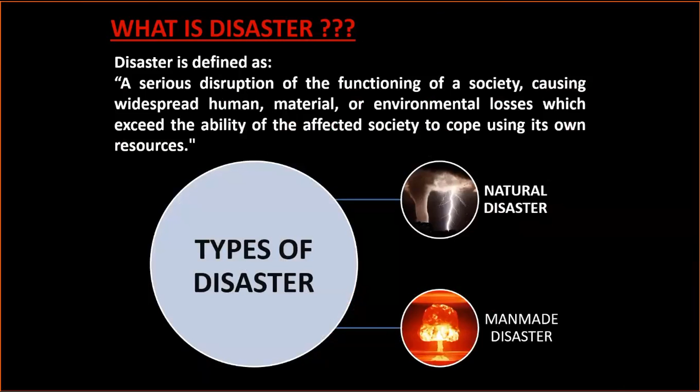We know what is the definition of a disaster. Disaster is normally defined as when the functioning of the society is totally stopped. The human life is totally disturbed. There are environmental losses, there are material losses. Disasters are of 2 types: natural disasters and man-made disasters. Under natural disasters come earthquakes, floods, tornadoes, fires, hurricanes, thunderstorms, and ice storms.

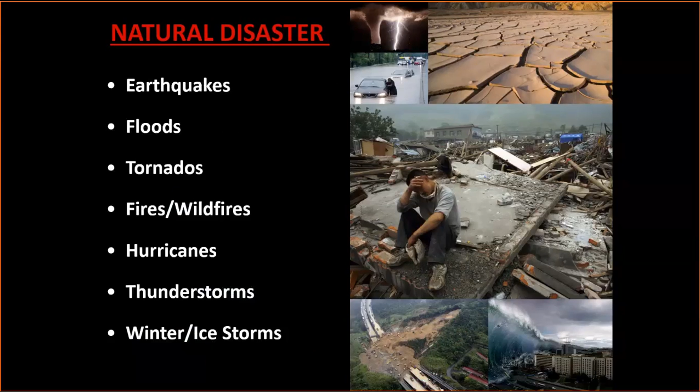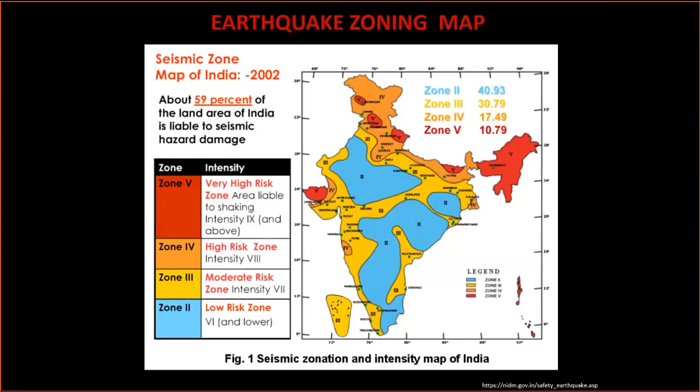Coming to earthquake, this is the seismic map of India. It is indicating that India is divided into 4 zones. Zone 5 is a very risky zone because here the intensity of the earthquake is liable to be very high, zone 4 is comparatively less intensive, zone 3 is moderate, and zone 2 is a low risk zone. And this is earmarked in different colors in this slide.

When any earthquake comes, obviously there's a huge loss of life. There is a huge loss of property. Then the invaluable heritage is totally lost whenever any earthquake comes. Communication networks always break down, and the power goes off. Transportation system stops working. The whole network breaks down.

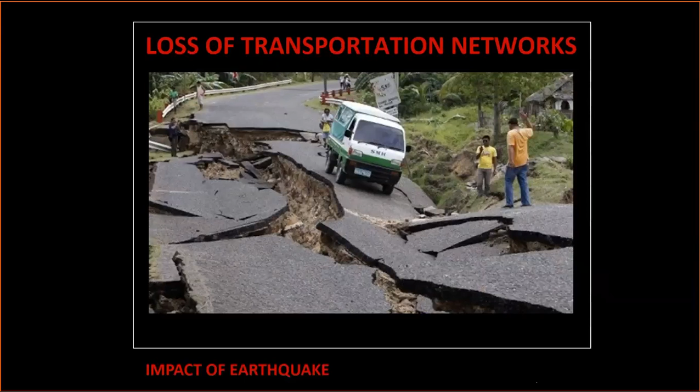Earthquakes have many types according to the intensity, according to the magnitude. And if we see the global occurrences of earthquakes, the highest category is rated as great earthquake, which is when the magnitude is greater than 8. The global occurrence is one earthquake of great category in 1 year on an average.

Then major earthquakes are more than 7 degree and less than 8 degree. About 18 major earthquakes come in a year, and strong earthquakes vary from 6 to 7 degree, and about 120 earthquakes come in 1 year. Moderate ones vary from 5 to 6 degree, and about 800 in number. You see the number. 800 earthquakes in 1 year of the moderate category come around the globe.

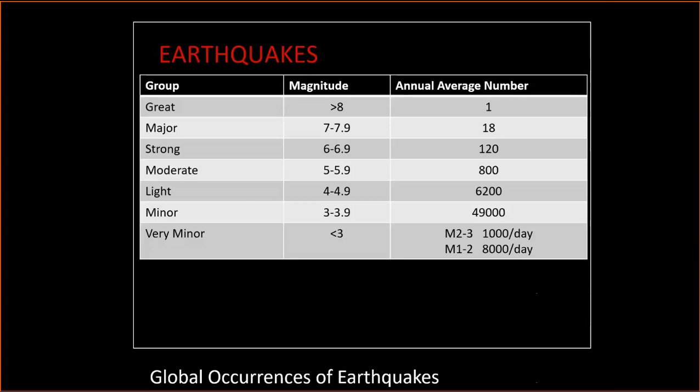And in the light category, which is from 4 to 4.9, about 6,200 come annually. And minor earthquakes are something like 50,000, and very minor are so many. So you can see the intensity of the earthquakes, the numbers. I will quote some examples.

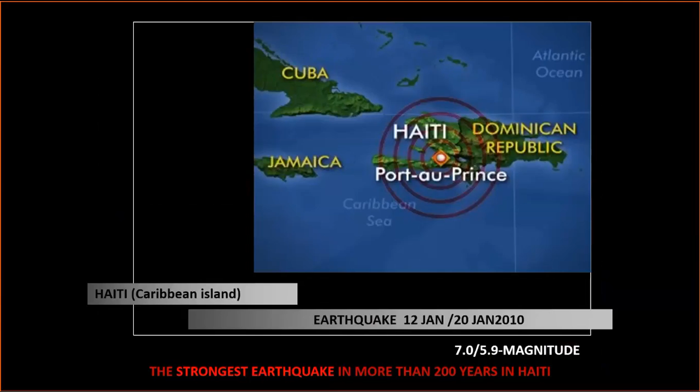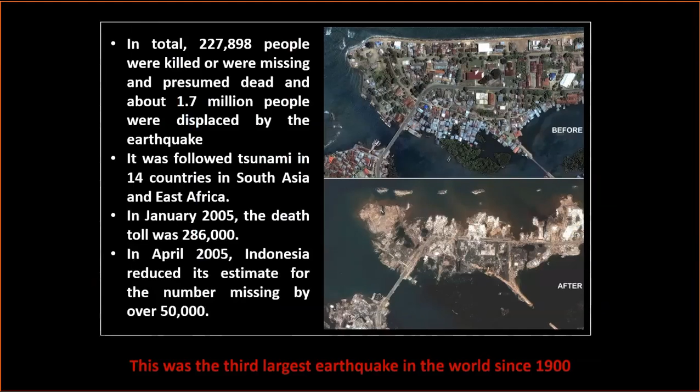Then in Indonesia, in the year 2004, there was an earthquake of magnitude 9.1. More than 2.27 lakh people died in this earthquake, and it was very severe. You see, so many people injured, and more than 2.27 lakh people lost their lives. And you see in the images, the entire place was almost finished after the earthquake.

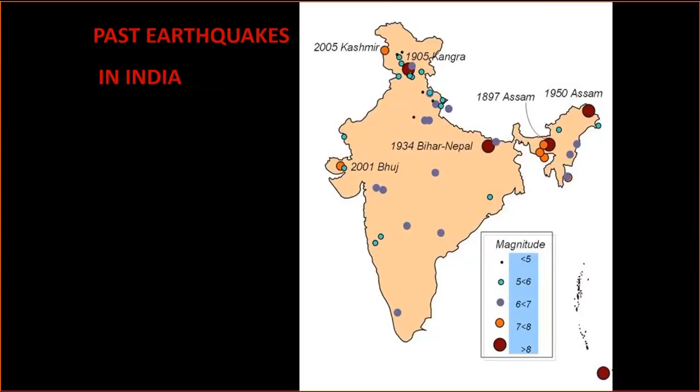If we mark all the earthquakes which have occurred so far in India, this map indicates small, big, bigger and biggest earthquakes. You can see hardly any part of India is very safe. Earthquakes do come in every part of India. The intensity may vary from smaller to bigger.

We all know that when buildings are designed to be safe, first of all, it is the role of the architect, because the architect is the person who coordinates with the consultants and the engineers, who gives the shape to the building, and who coordinates with the structural engineers to design the buildings. His role is very, very important.

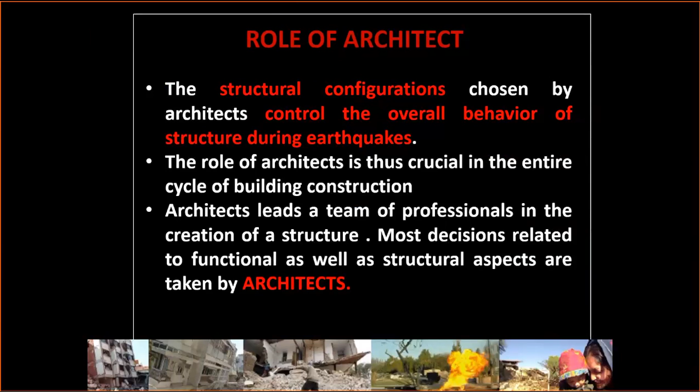When we talk about the seismic design philosophy, we can have two models. One is earthquake-proof buildings, which are not possible. It's an unrealistic dream. You cannot make any building earthquake-proof. But the realistic approach is that we can make earthquake-resistant buildings. Earthquake-resistant buildings are possible, but earthquake-proof buildings are not possible because of budgetary constraints.

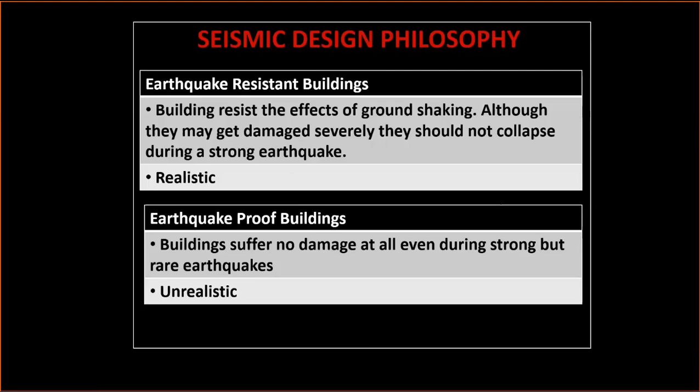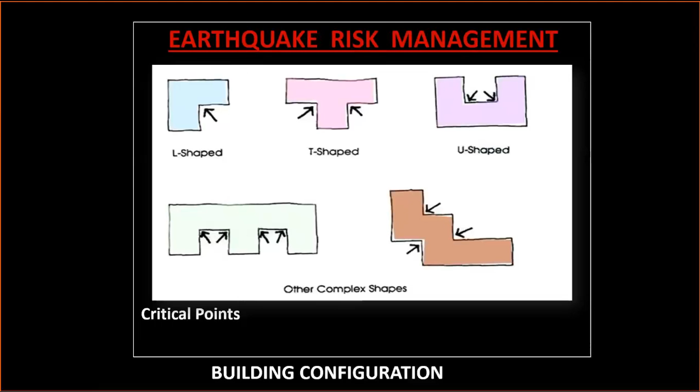These are the different plans of buildings. It shows that whenever there is any bend in the plan, that is liable to be exposed to the danger of earthquake. Earthquake forces are very active on corners. And you see, this is a building. When the earthquake came, only the corner portion fell because that was more prone. Forces come from both sides and the corner gets shattered, and the rest of the building is safe.

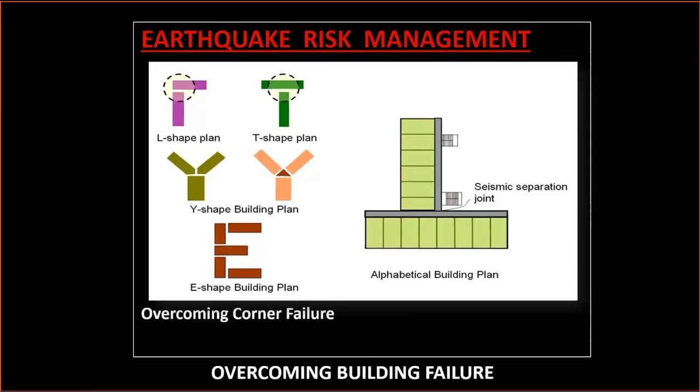Whenever any building is designed, the corners and the bends are to be dealt with very, very carefully. You need to provide expansion joints there, or you need to work out the shape according to the earthquake forces. And some success stories.

This is the Imperial Hotel in Japan, designed by the famous American architect Frank Lloyd Wright. Frank Lloyd Wright is one of the master architects we used to study in our architecture syllabus. He designed this project in Tokyo. And we all know that Tokyo, Japan is highly earthquake prone. In this project, great care was taken to make the building earthquake resistant.

The architect wrote in his notes that he was giving a huge water body in front of the hotel so that in case of fire, there's no need to bring water from outside. An earthquake mostly leads to fire, and this water can be used to extinguish the fire.

In addition to that, he advocated a low height building with a concrete structure, and not concealing the cables in the RCC, in the concrete walls or the concrete roof. And he opted for a copper ceiling, which is flexible, and all those measures were taken. Expansion joints are provided at adequate places.

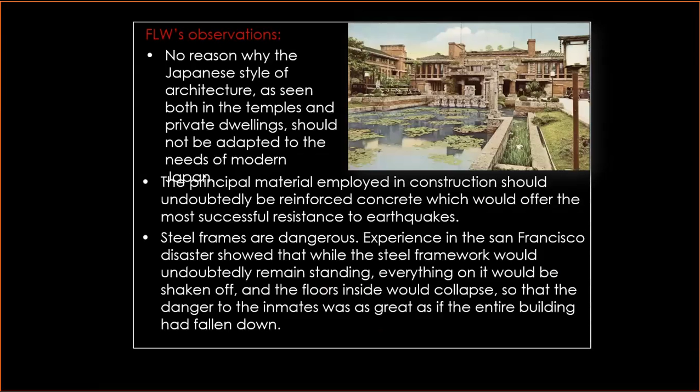And that has proved the architect right, because he convinced his clients that I want this kind of a building which is earthquake resistant. And because the building has sustained itself from the earthquake, that is why it became a very famous building in the history of Japan's modern architecture, in the history of the world's modern architecture.

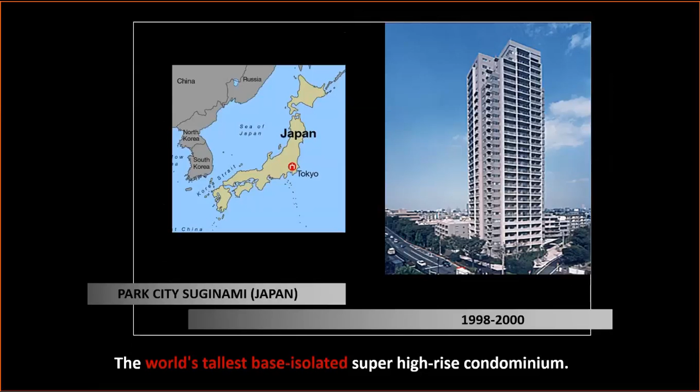Then, with the passage of time, the technologies are getting advanced. This is a Park City apartment block in Japan. It's a multi-story building which came into existence in the year 2000. This project is the world's tallest base isolated structure. In this project, a new experiment was made where the building is not connected with its base.

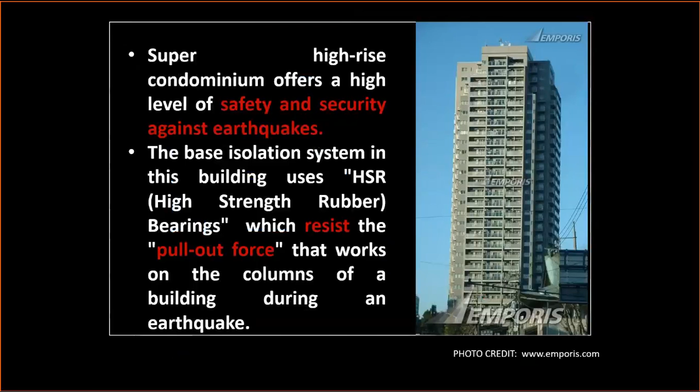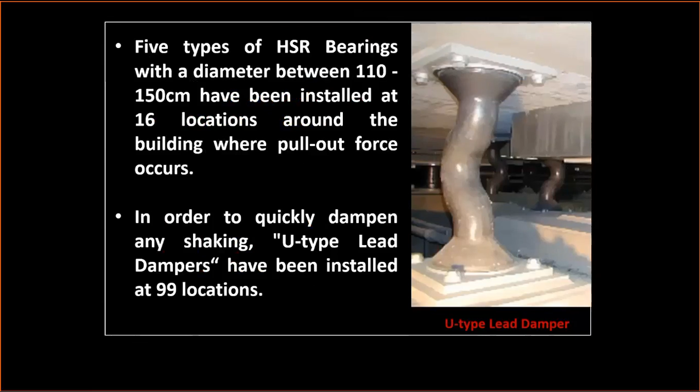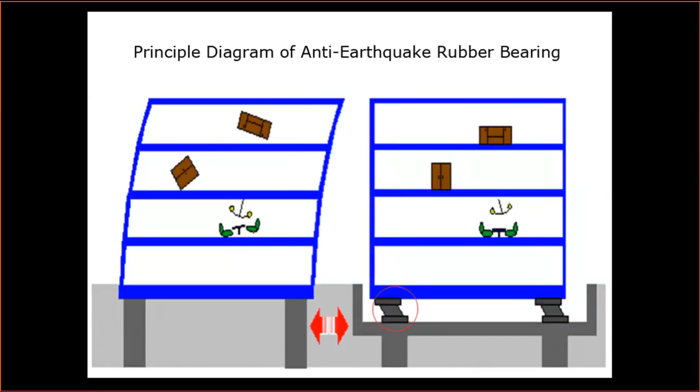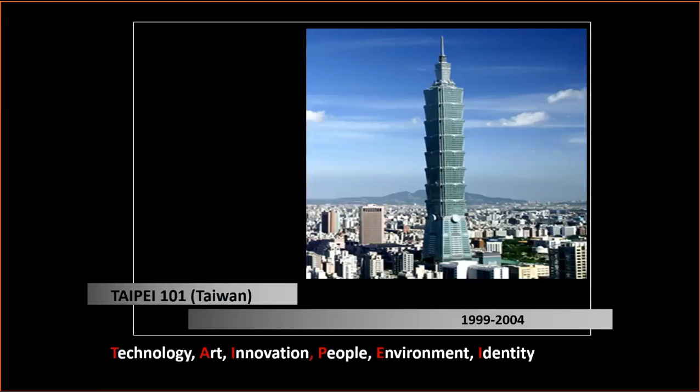And the next example is this building in Taipei in Taiwan. The building name is Taipei 101. 101 is the number of stories, and before Burj Khalifa, this was considered to be the tallest building. And engineers and architects have claimed that when this building was designed, they analyzed the data of earthquakes and the wind pressure of the last 2,500 years.

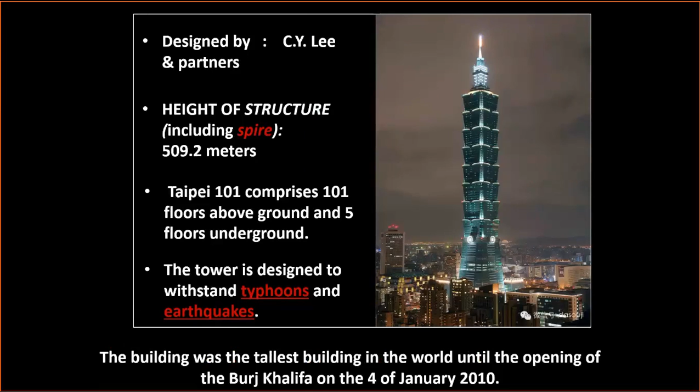And C.Y. Lee Partners have designed it. It's a 500 plus meters high tower having 101 stories. And it is one of the most successful projects from the earthquake safety point of view. And here they have used a new technology. At the top of the building, from the 92nd floor to the 88th floor,

they have put a very huge ball kind of a substance which works like a pendulum. It's a pendulum style 700-ton tuned mass damper, which is hanging from the 92nd floor, and it is reaching up to the 88th floor.

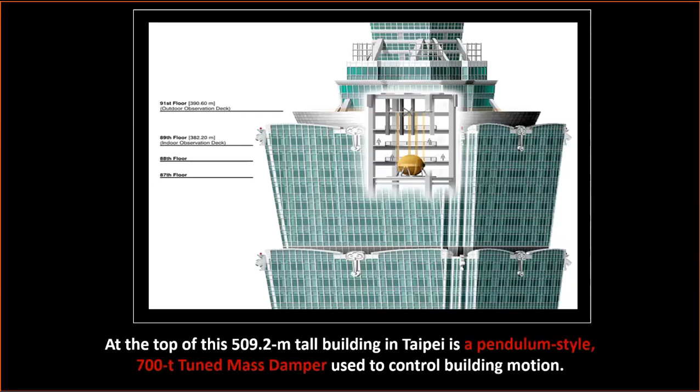When the earthquake comes, this pendulum moves in the reverse direction. If the building moves to the right, this pendulum moves to the left side. And it is so heavy that it brings the building back to the position. It never lets the building sway beyond a point. Hence, this building never falls down. And this is a very unique experiment, very scientific, it's a piece of engineering excellence.

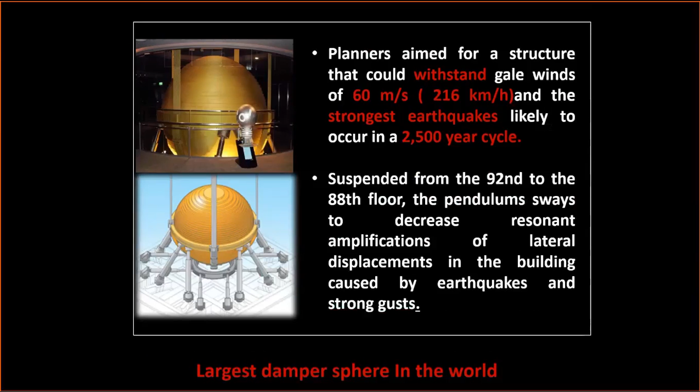And this is the mass, 700 ton, this is the pendulum which I was talking about. And as I said, the engineers are claiming that they have studied the data of 2,500 years to arrive at such decisions.

And when we talk about India, we all know that there was an earthquake in Gujarat, and the existing hospital in Bhuj was destroyed, and even the patients there died. So the government of Gujarat at that time decided to construct a new hospital at the same location, which would be the first building in India to use base isolation technology. So this is the first building in India in which base isolation technology was used.

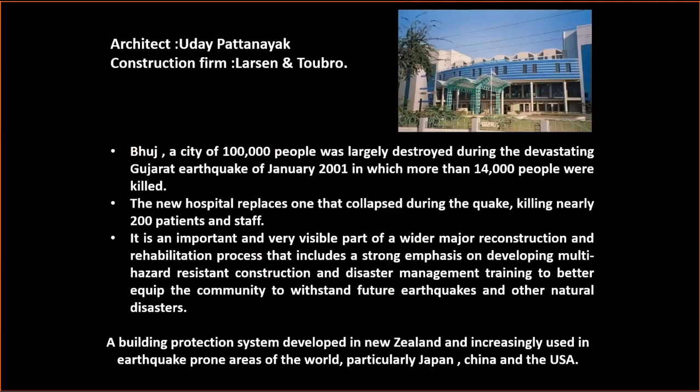In Gujarat, we all know that about 1 lakh people were largely affected during the devastating earthquake, and more than 14,000 people died. And where this present hospital building is positioned, there was an old hospital which got destroyed, and it killed nearly 200 patients and staff members, because the hospital building itself was not safe.

And in Japan, the technology is further getting advanced. Now they are making large-scale, very scientific models of the buildings. And before execution, they test the strength of the building by shaking the floor at a given magnitude. The floor is shaken, and if any fault occurs in the building, then the model is rectified, and before executing the building on ground, all the studies are undertaken.

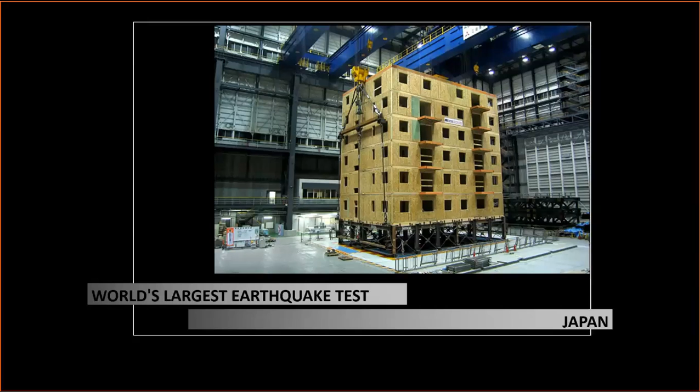So Japan is one of the top nations which has done a lot of good work in earthquake safety. This is one building which is being tested in the lab before being executed in Japan.

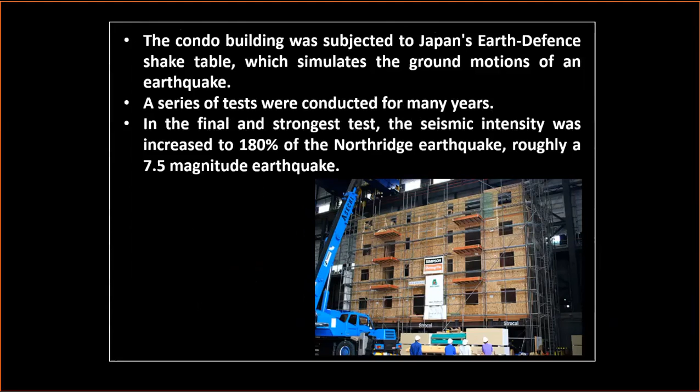So the conclusion of my talk is, in order to make the buildings earthquake resistant, it is important to make the buildings symmetrical. It is important to create separation joints between different blocks and at the bends. And the simple buildings are more earthquake resistant.

And we should avoid cantilevers, and we should opt for RCC framed structures. Steel structures are not that safe, it is believed. And in addition to that, we can avoid double height stairs, and all junctions of columns and beams should be properly secured. And with this note, I close.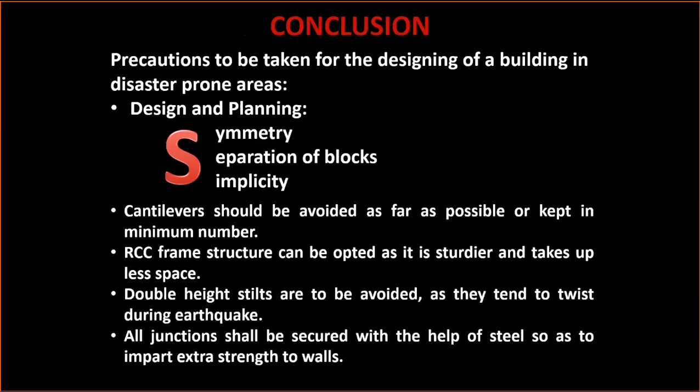Thank you very much, sir. Thank you very much for enlightening us with the great information on earthquake safety, which is a great topic, and I'm sure it requires a major role of the architect while designing and of the structural consultant during construction of the building. Thank you very much, sir.

Over the years, he has worked in design and estimation, contracts, sales and marketing, business development and codes and standards. Some of the projects he has worked on include raising awareness of environmental issues related to HFCs, and establishing the Center of Excellence to provide estimation, design and engineering services to Tyco Safety Products offices in the Asia Pacific region.

Mr. Iswar has also written and presented various technical papers to the Loss Prevention Association, LPA, Practicing Engineers, Architects and Town Planners Association, PEATA, and the Asia Pacific Fire, APF magazine. He chaired the IFSEC conference in India, and acted as a speaker in several major seminars, including the LNG Third World Summit in Tokyo and the Hydrocarbon Seminar in Kuala Lumpur, Malaysia, and several conferences across India.

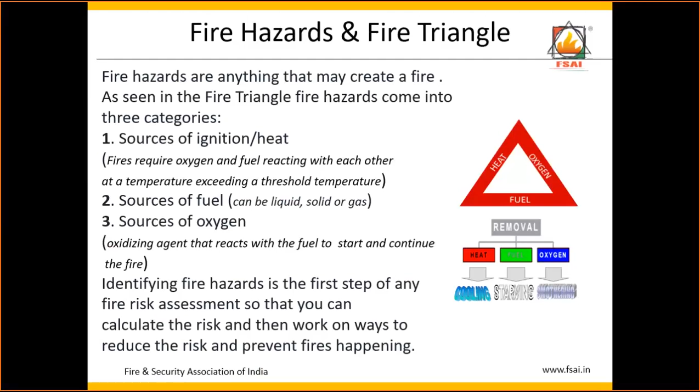Then the fuel could be starving it. Let's say you shut off the fuel valve, then you're starving the fuel so that you're not continuing the fuel supply for the fire to sustain. And the oxygen, you're basically trying to smother. Smothering could be by either inerting it, or it could be by adding foam to smother, or using some extinguishers like DCP. So these are the techniques for handling the fire situation.

Now let's look at certain potential fire hazards in the workplace. There are about 50 of them listed in this. I'm not going to read all of them, but I'd like to highlight some of the hazards which are more related to commercial buildings, because that's what we are looking at, sustainable buildings. So if you look at the ignition fire hazards, you have smoking materials, electrical faults, radiated heat, cooking equipment, overloaded electrical circuits, static electricity, friction, hot surfaces, and electrical equipment, which are all there in a typical commercial building or even in a residential building.

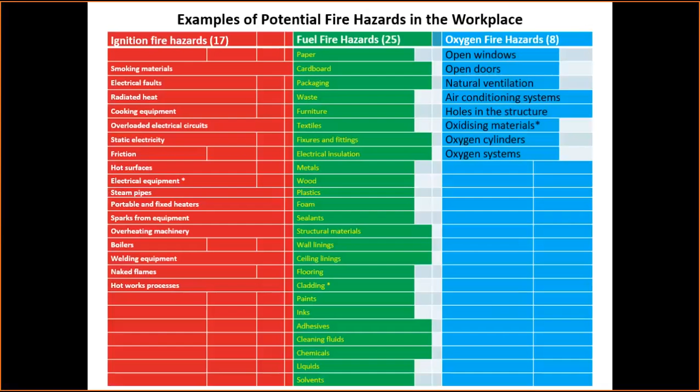Then you have fuel fire hazards like paper, cardboard, packaging waste, furniture, textiles in the form of draperies and upholsteries, fixtures and fittings, electrical insulation, metals, wood, plastics, foam, sealants, structural materials, wall linings, ceiling linings, flooring, and cladding. Then you have the oxygen fire hazards, the third leg of the fire, which could be open windows, open doors, natural ventilation, air conditioning systems, holes in the structure, and oxidizing materials. Not much in a commercial building situation, but the other ones highlighted before are quite prevalent in most commercial buildings.

Now the key thing to understand is when a fire basically reaches the flashover stage, it becomes very difficult to rescue people or save the property. This is the basic thing which a fireman or a firefighter dreads. Now, let me also sensitize you about the flashover timing. In earlier days, when furnishing was not synthetic, typically flashover would be reached within, say, 6 to 7 minutes. But with modern rooms, where furniture uses synthetic materials, flashover could occur within 3 to 4 minutes, to be more precise, 3 minutes and 40 seconds.

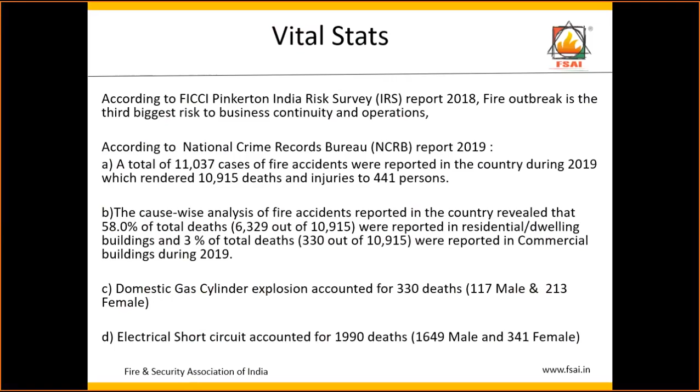The electrical short circuit accounted for 1990 deaths, which in this particular case is more of the males falling prey to that: 1649 males and 341 females.

So let's look at fire and life safety objectives. We have defined fire hazard, we defined what's a fire triangle, we defined the various hazards that we find in a commercial building. Then we said, okay, let's look at what is the gravity of the situation over here in terms of casualties. Now, how do we alleviate this, if not eliminate this?

So basic fire and life safety objectives would be to protect the people, building occupants, firefighters, the neighbors, protect the property, fire within, between, and external to the building, protect the business operations.

It's important to understand that any organization which suffers a fire, they find it difficult to come back into operation. Some of them just go bust and business operations cannot happen.

And now, with so much interdependency when it comes to the supply chain and the manufacturing not being under one roof, it becomes far more important that even the other partners in the production process or the manufacturing process have their fire resilience and fire safety practices up to the mark, so that any fire in a particular location should not impact the business operation.

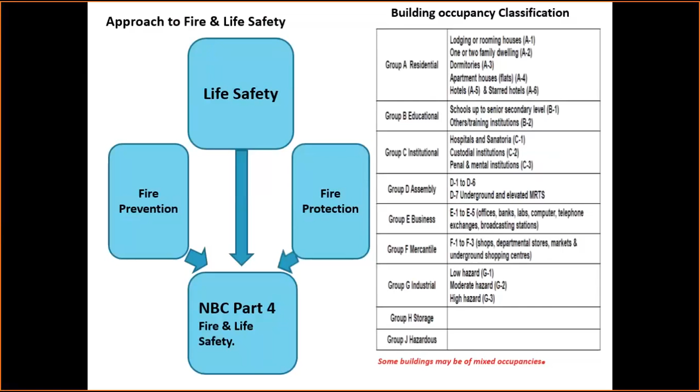After this we have the classification, but there may be some buildings which are of mixed occupancies, and in such instances the occupancy which commands the highest risk would essentially be the occupancy that governs the fire safety requirements.

Now let's look at fire prevention, life safety, and fire protection - the three approaches. Fire prevention essentially relates to the structural components of the building, the material and type used for construction, which is quite important when we talk about sustainability - we have to ensure stability, integrity, and insulation are taken care of. Other elements of fire prevention include access road to the building, setbacks around the building, the height of the building, the floor area, and the layout.

NBC states specific limitations for each of the occupancies we examined, the 9 occupancies. Then there's glazing, facade, interior finishes, and the fire command center. It also talks about support facilities like substations, lightning protection, electrical installation, emergency power for fire and life safety systems. I'd like to add that Part 3 also needs to be considered when Part 4 is being considered for fire and life safety objectives, because Part 3 has certain requirements - Part 4 cannot be taken in isolation. Some requirements of Part 3 need to be embedded when it comes to life safety and fire prevention requirements.

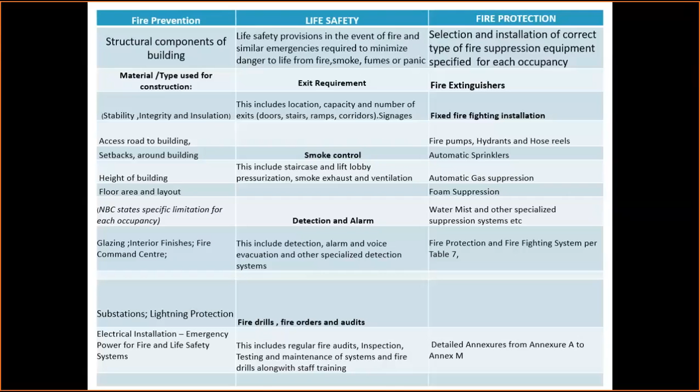Another example I could give is that the NBC typically calls for variable speed drives, and nowhere in the world do you require that unless you're talking about very high-rise buildings, where you need the affinity laws and have to change the speed to change the head of the pump. But for a typical firefighting pump in any location, even up to say 250 or 273 cubic meters per hour, you really don't need a variable speed drive. In fact, one of the IS codes, 13039, says that it has to be a DOL. I'm highlighting these because these are glaring discrepancies and they need to be corrected, and I understand from a webinar conducted by one body that these are going to be addressed.

Now, let's switch gears and talk about sustainability. If ignitions and fires are limited, that is good for the environment, right? As Suresh talked about, whether or not you have sprinklers affects sustainability. The materials can be made more ignition and fire resistant. Automatic sprinklers can reduce the overall size of the fire and the fire effluents, meaning the emissions, and also the runoff of fire water discharged onto the fire scene that goes into the sewerage.

Proper separation and fire resistance of the exterior limits building-to-building fire spread potential, whether through the facade, the fire leapfrogging from one floor to the top floor, or even to an adjoining building if they are virtually kissing each other. Fewer fires definitely means lower impact from buildings and fire department apparatus and emissions, because the fire department would typically use very high capacity hose streams, meaning more water runoff, and a huge fire obviously means CO2 emissions.

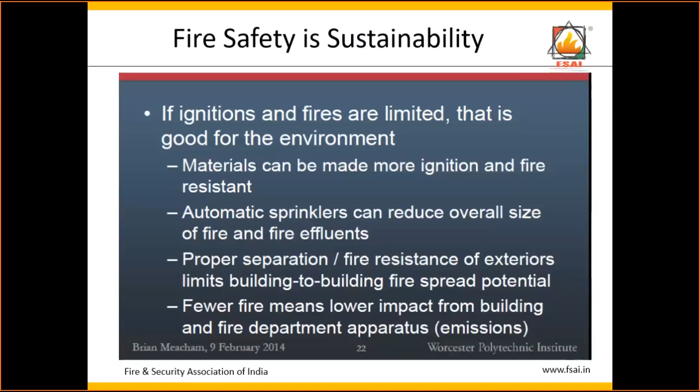Now, one of the things that Suresh brought up in his keynote address was very pertinent: he said we are seeing a dichotomy between sustainability and resiliency, and that's a hot topic currently. Something hot from the press, October 2020, and this report you can find on the NFPA website also. I am quoting from this report, which very clearly elucidates the gravity of the situation and how we need to focus on this particular issue.

SAFR buildings, right? Sustainable and fire resistant. We can call it 'suffer' because it's a good Hindi word. So I think we are on a 'suffer' on this journey to make buildings more fire resilient and sustainable. These are buildings designed to be both sustainable, in terms of reducing or eliminating negative impacts on our climate and natural environment, and resilient, in terms of their ability to safeguard people, property, operations, and the environment from unwanted fire.

The aim is to basically promote a holistic and integrated approach to achievement of SAFR objectives in building design, and this is extremely important since some significant fires associated with green building features, attributes, and technologies have been observed. And this is fairly well documented in the report also.

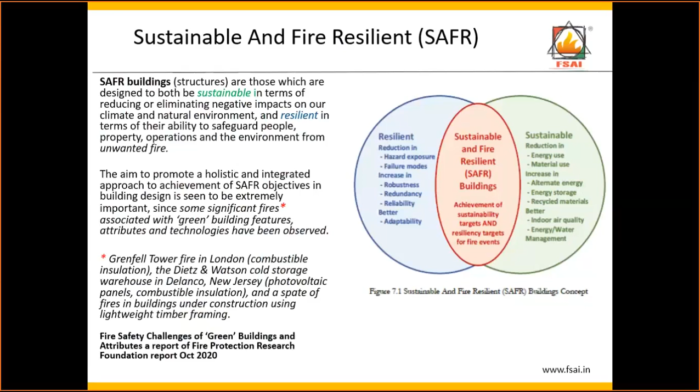Now, I would like to highlight some excerpts from two reports so that architects and fire engineers and the people who are involved in the design process are sensitized. And this one is from the fire safety challenges report, which I referred to in my previous slide. This is succinctly put: a green building is not so green if it burns down and needs to be reconstructed. Well said.

Now, this report notes that gaps remain, and strategies for proactively incorporating fire performance into development of new green building materials and features, product development, are lacking. The tools to proactively assess the fire performance of green building materials, systems, and features at the product level, for example, fire performance testing as installed in buildings, are lacking. And a broader building regulatory framework and design philosophy for achieving sustainable and fire resilient SAFR buildings is also lacking.

Probably the chapter on sustainability that we have in the NBC could need an overhaul so that it addresses this issue of certification and a reassurance that the product not only fulfills the environmental categories, but also is fire resilient. Here is another one, which is an excerpt from the Quantification of Green Building Features on Firefighter Safety. It's a report from 2011. I feel that even though we are about 9 years down the line, this problem still persists.

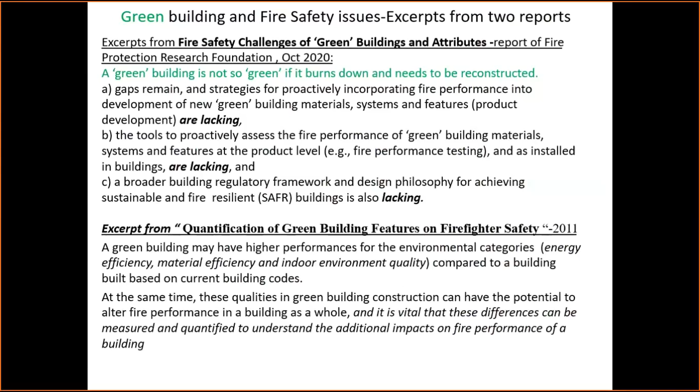So probably bodies like CBRI, and I don't know whether there are other private bodies, can basically test and certify, saying that they meet the performance categories as required to meet the environmental criteria and also the fire resiliency. Some views expressed by experts on green building practices. One is from Robert Solomon, Division Manager for Building and Life Safety at the National Fire Protection Association. He says, we are seeing green designs that prescriptive codes don't address or have not even considered yet. And this is a quote which is just a couple of years old.

The second one comes from Craig Hofmeister, Vice President of Engineering Technology for RJA Group. Again, this is fairly current. The new methods and materials that are used to support green building concepts can result in specific fire hazards, just like in traditional building design, which means green concepts should be reviewed as part of a fire protection and life safety analysis, which is what Suresh also emphasized in his keynote address. Experts are careful to caution that green building designs do not equate to increased fire and life safety hazards.

Rather, owners of green buildings might have to be aware that green designs can present previously unconsidered challenges that arise as a result of construction choices. So there is one solution. Again, that calls for expertise. Performance-based design metrics can be used as a tool to resolve conflicts between progressive green design elements and prescriptive codes.

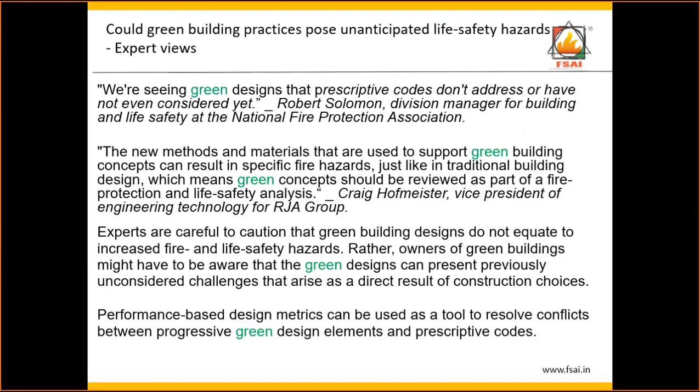I'd like to conclude this with observations of the FM report on the influence of risk factors on sustainable development. This report provides two conclusions that should be points of focus when studying the impact of green building and our environment. First, efforts to improve sustainability solely by increasing energy efficiency without consideration of risk, read fire, have the potential to increase the relevance of risk factors by a staggering factor of 3.

Second, without effective fire protection systems, the risk of fire increases the carbon emissions by 30 to 40 kg of carbon dioxide per square meter, an increase of 1 to 2% over the life cycle of a standard office building, and can add up to 14% to the carbon emissions over the lifetime of a facility exposed to extensive fire hazard. Now, with this, I conclude my presentation.